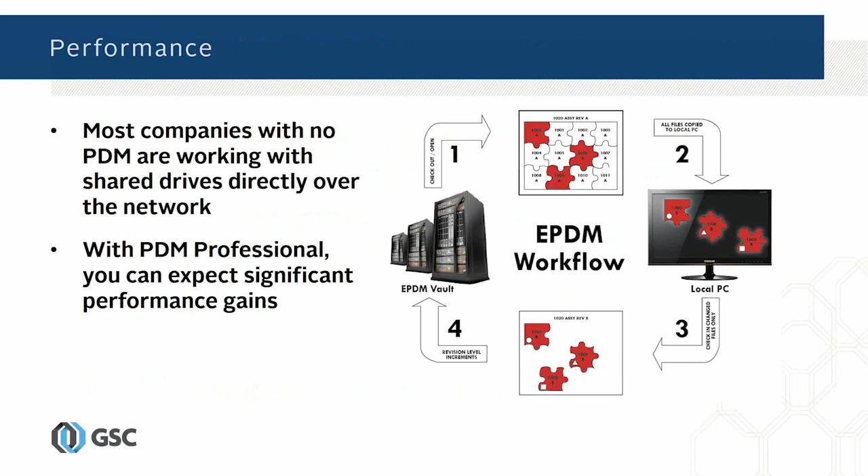The core values of PDM Professional are that you're going to have a short productivity curve. It's not hard to learn how to use as an end user. It's going to have all kinds of security, searching, data replication through multiple sites, multiple flexible workflows if you want to have it with PDM Professional, and data connectivity to other systems. Again, I'm going to be speaking more of PDM Professional on all these things, and then the scalability. So that's really what PDM Professional is all about.

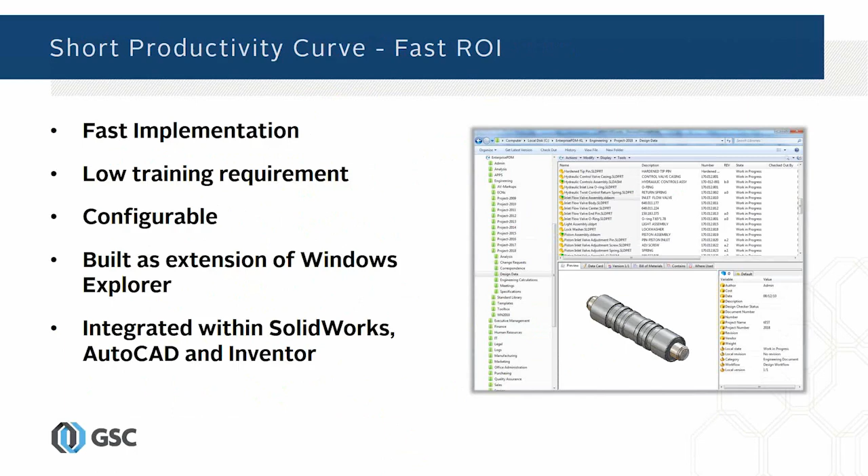The fast, quick learning curve comes from the fact that we really make use of SolidWorks and Windows standard constructs in the operation of SolidWorks PDM Pro. So if you're looking at the outside world, outside of SolidWorks, and you're coming in from Windows and you want to see what's in the vault, you just go into your regular Windows Explorer and mouse over to the virtual drive, which is actually your vault, and then boom, you have the information from PDM right there. It's all also integrated with your CAD software as well.

Design reuse means you can find things easily and quickly, so it's easier to find things and reuse them than it is to recreate the same geometry or things you think you may have made a couple of years ago. People do that all the time now because it's not easy, it's not fast to search in plain old Windows. But imagine if you had essentially a Google for your files and you could find them within a second or two of just typing in some parameters. That really can change the game quite a bit.

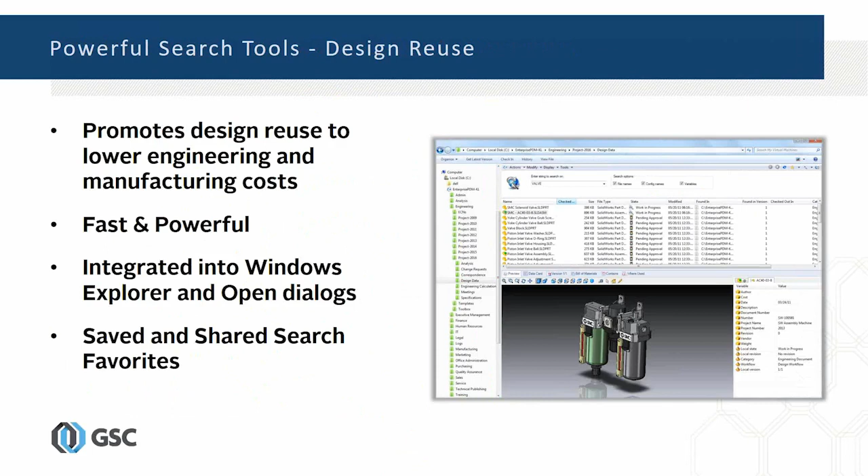Because we have workflows that you control, that you specify with our help when we do the implementations, it means that PDM will work the way you want it to and not the other way around. And you can, in PDM Professional, do multiple workflows with all kinds of complexity. Workflows can call each other. There's really no end to the kind of controls you can have. Again, this makes it consistent and secure when routing documents, making approvals, all those things. The workflows you have now can all be mapped into PDM Pro.

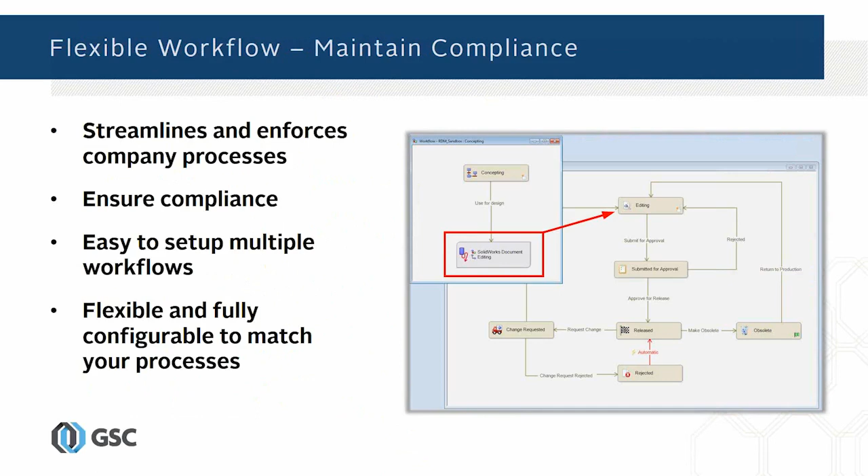Because it's nearly infinitely scalable in terms of number of users and number of sites, SolidWorks PDM Professional is a great choice for companies that are growing or that want to start small and then scale up over time. Because you can implement the solution initially with just one site, one server, and a few clients, maybe in a certain project, and you can go ahead and start growing that out and going to different sites. It's all built right into the SolidWorks PDM Professional software.

Data connectivity is something more and more people want to automate beyond just CAD and engineering. They want to talk to purchasing, the shop floor, and things of that nature. Because we're based on SQL, we have a database that can talk to almost anything. Whether you want to upload your BOM to your ERP system, export a list of items to purchasing, or whatever, there are all kinds of ways to do that. Not only can we do it on demand, we can also do it automatically as part of PDM Professional.

The security in PDM often surprises and delights IT administrators who are used to being locked into the Windows security construct, where it's file-based and there's not a whole lot of granularity in terms of options. With PDM Professional, we have all kinds of different levels of security based on files, based on folders, based on users and groups of users, and based on the state of the file, which we'll talk to in a little while.

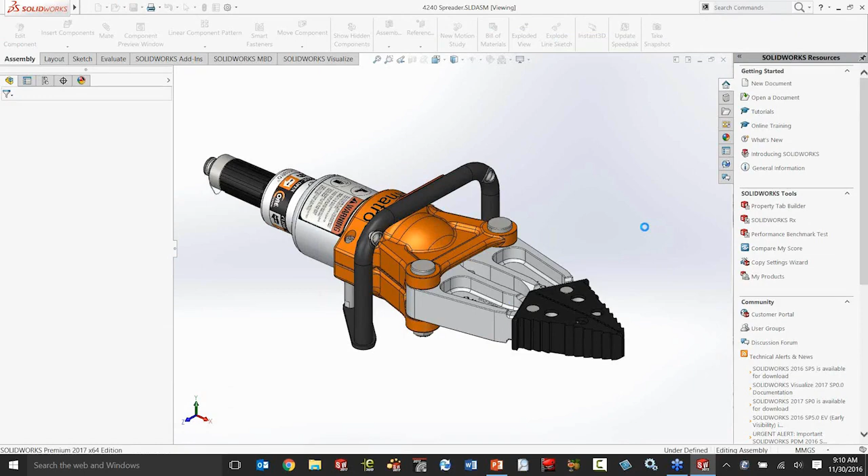So bottom line is, I say open. It says you want to check it out. I say yeah, good call. And that's usually all I have to do is just say yes, check out. So what it's doing here is it's going to actually download the files to my local machine, unless they're already local, and then I'll just open them up locally, so manage those copies.

So I open this guy up, and I have the ability to say change this. It's a regular SOLIDWORKS open. If I look over in the task pane here, I have a tab for SOLIDWORKS PDM Professional. And if you look at this tab here, we can see that we have some indicators of what's going on.

There's a pencil here because this thing is under editing, and I have an equal sign here. The equals is telling me the state of my local file set versus what's in the vault. So this assembly, these parts are all the same version as the one in the vault. That lets me keep track of what version I'm looking at, and also if someone else changes a part that they have access to that I'm referencing, when they check in the changes, I can see the indicator here that there's been a change.

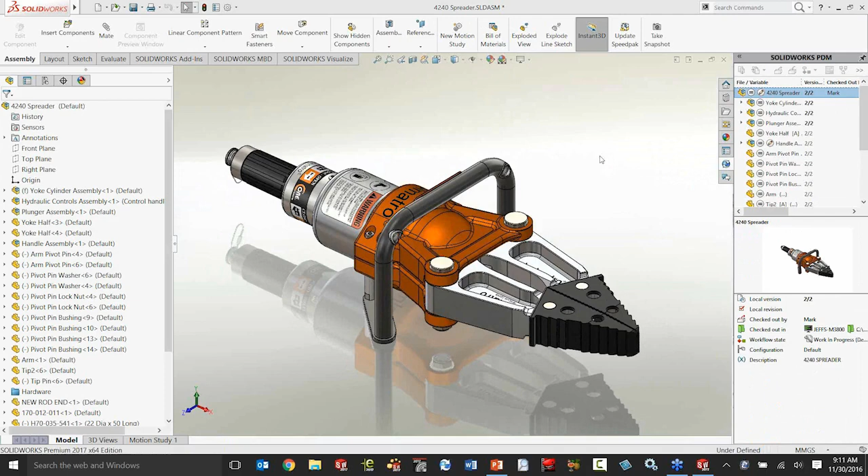But just to go through it real quick, our scenario here is that this thing is pretty much done, but we determine we need to have more strength in the front end and the arms themselves. So one thing I might do as a SOLIDWORKS user is I might decide I want to just open this up in its own window for convenience.

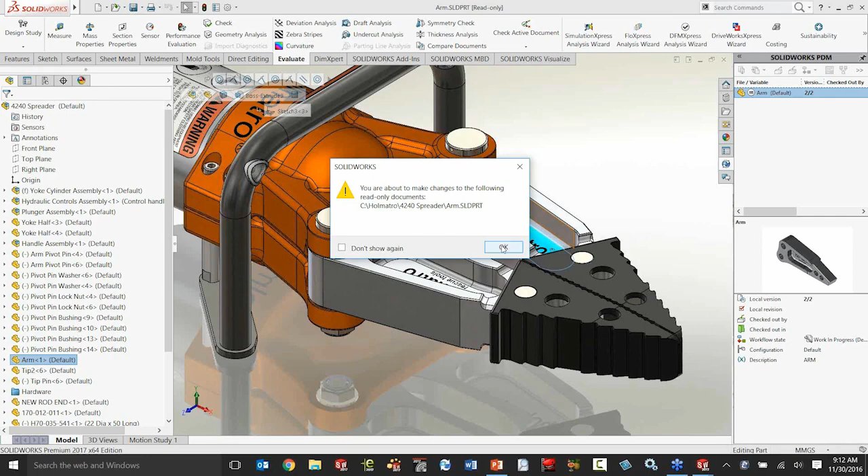Again, all the typical constructs that you have with SOLIDWORKS you can do here. So I can go ahead and click on this and open it up in its own window like I normally would do. And what SOLIDWORKS will do is say it's going to make changes to this read-only document. Why is it read-only? Well, it's read-only because I haven't checked it out yet.

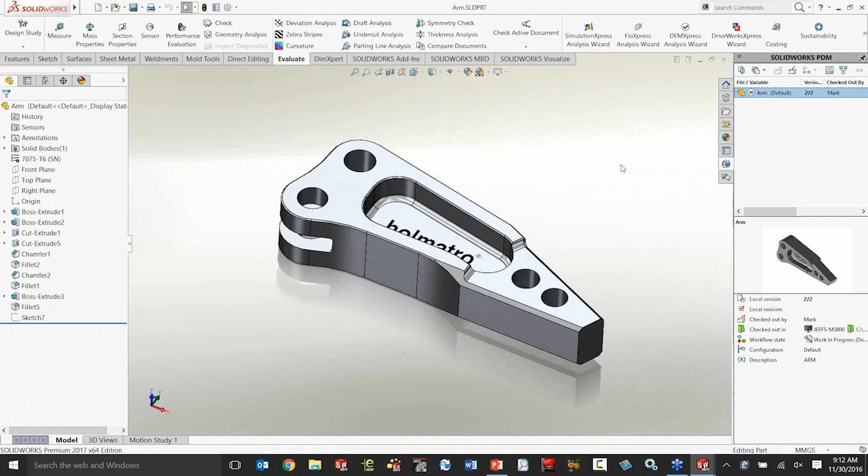So let's go ahead and make a change. Let's make it thicker. I'll take this web and I'll make it 40 millimeters. So that'll make it much thicker. I could do some other changes I want.

Whenever I decide that I want to bump up the version, save it, put a line in the sand here and say this is a version that I want to save, I just go ahead and say okay, check in these changes at this point. And it's going to bump up the version number, so it's going to go from 2 to 3.

And I'll say, what did I do here? I'll comment that I thickened the web. Regardless of whether I put a comment in here, the user, the version of the file, time and date stamp, all that will be kept in the file's history as we go forward.

And I should also mention that versions are not revisions. Versions are just 1, 2, 3, 4 - just a serial number, from 1 to X, of all the changes that occur in a given document inside a PDM. It's just a system that keeps track of that. It's great for the work in progress stage where I have versions. I want to go back to what I did this morning or yesterday.

I can do that. But revisions are typically reserved for things like a release process. Or if you do an ECO and you're going to do another revision, so A, B, C, or however you want to number and letter those things, that revision field is typically untouched until you get to a certain place in the workflow where the part or assembly or drawing or whatever is quote unquote released. So version is not the same as revision.

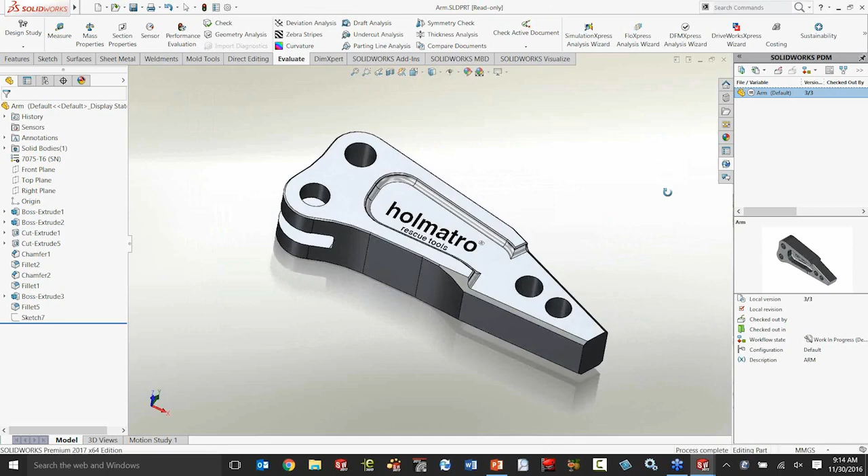So we made that change there. I can also go back to any version I want. Inside of SOLIDWORKS, the way I would do that is to say get version, I can go back to version 1 to see what that first version looked like. And I can do that.

We can also do this in Professional with Word documents and any other document that's inside there, but inside of SOLIDWORKS is how you do it. You can see here that it's warning me in the status field that I'm looking at version 1 of 3. It gives you this little red counterclockwise clock saying you're looking at something older than the latest version in Vault. I've also customized my interface to put a red line in that field.

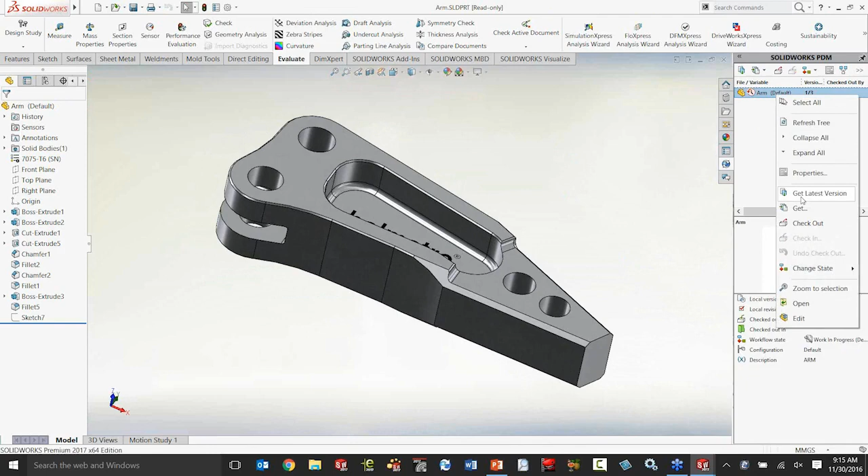This is really helpful when you're working on an assembly. Someone checks out one of the parts you don't have checked out, makes changes collaboratively, and then checks those changes in. Within 1 or 2 seconds, that line will change from the gray equal sign to this kind of scenario right here. I can see it and say, oh, that doesn't matter to me, that's elsewhere in the device I'm working on, I don't care. Or I can right-click and say go ahead and get the latest version right now, and it'll do that for me.

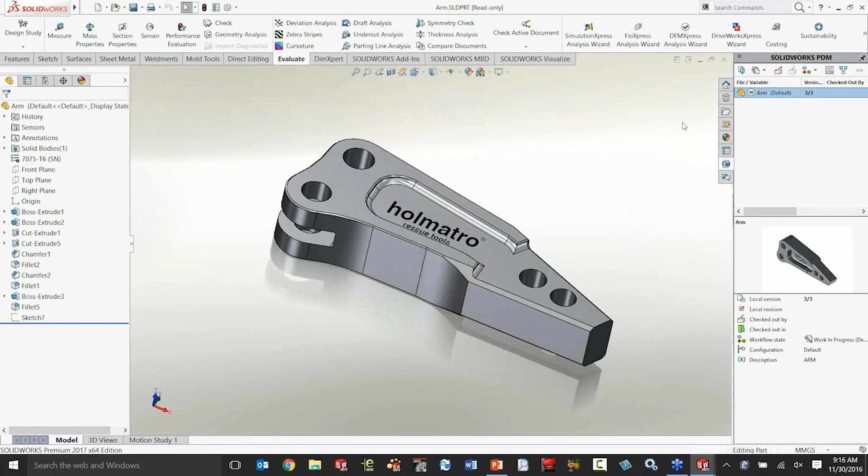With PDM, one of the great things is that you have this built-in history, the ability to go back in time without having to save v1, v2, v3, v4 versions of your physical files and try to keep track of all that stuff. It automatically does this for you, not only with parts, but also sub-assemblies, drawings, and assemblies. As I go forward, the assembly knows what version of the parts were in there, and the drawings know that as well. I just make my changes and let SOLIDWORKS PDM handle all the details of keeping the version history for me.

The other thing I want to do here is replace this part. So I'm going to get rid of it, just delete it, and I need to make or get a new one made of a better material that's more suitable to what we're doing here.

This is where design reuse really comes into play. If I want to reuse a file, the first thing I have to do is be able to find it. As I mentioned before, many times people will look for a couple minutes and then say, forget it, I'll just make a new one. That can cause all kinds of headaches and wasted time, if you don't have an efficient way to find everything that ever existed in your data, folders, which we do have inside of PDM.

So I'm just going to go ahead and do a search. I can do a couple different kinds of searches. The built-in complete search is the Swiss Army knife of all the searches, it comes with access to all your custom properties, and I can look for things at a certain point in the workflow, which we'll talk about.

So I just find released parts, for example. I can use our data cards. As you'll see later, data cards are a way for people outside of SOLIDWORKS to look at custom property information, essentially what's in the database. The data card is a presentation of that in a sort of a card catalog format. Different data cards exist for different kinds of files, because what you track for an Excel spreadsheet will probably be different than what you track for a SOLIDWORKS part.

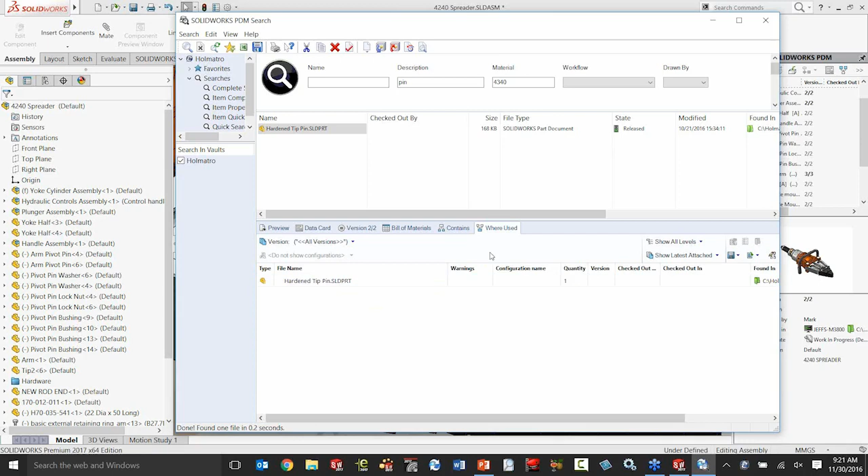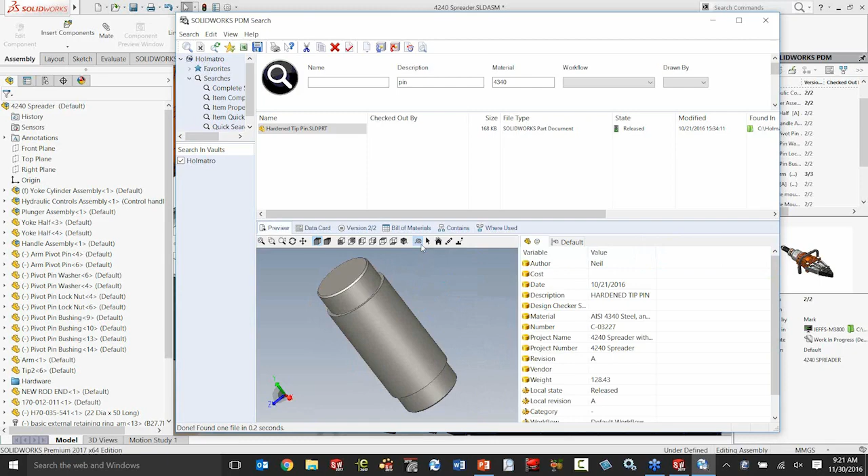I can also look at a preview and see what it looks like. This is the thumbnail graphic that SOLIDWORKS keeps inside the file itself. If I click in here, after a moment you'll see that we also have eDrawings Professional built into PDM Professional as well. So I can spin the part around and measure it to see what the diameter is, if it's going to fit. I could also keep track of diameter and length as data fields in my database and search on those, but in this case I'm just going to measure it and find out that yes, it is the right size, magically enough.

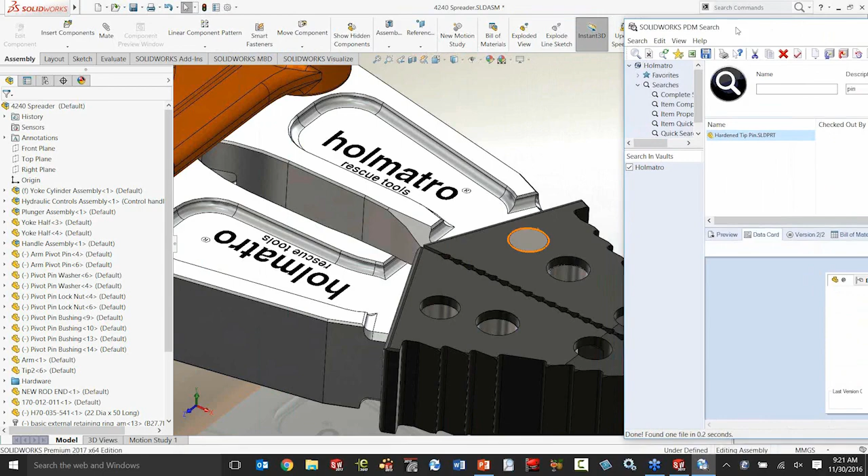So let's go ahead and bring this window over. It's just a regular Windows window, so I can drag and drop the part in here. If it's got 8 references, you can deal with that too. Now that I've done that, all I have to do on the CAD side is edit my mirror component assembly feature and add the new part to the mirror list there. So we got both of those.

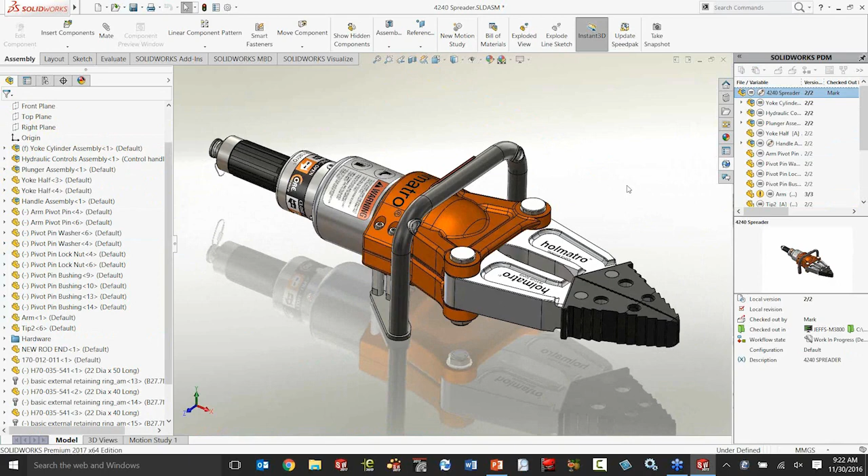So that's what it's like to make changes to parts and assemblies. When you make a change to an assembly or part, typically you also want to open the drawing to make sure everything looks good, maybe add some new dimensions. I can do that by doing the standard open drawing command from here, or find it in the database. But I'm going to do something different, I'm going to go to the regular open command in SOLIDWORKS.

Now you may or may not know that the open command and the save command in almost all, darn near all, of the Windows applications out there, they use the common object dialog for open and save. In other words, they use the dialog box construction that is part of and built into Windows itself.

So I'll go to open, find this, look at the data card, and say okay, let's go ahead and open that up. Now I'm opening up a drawing. SOLIDWORKS PDM comes in and says, well, it's in the vault, do you want to just open it and look at it, or do you want to check it out? Yeah, thanks, I do want to check it out because I'm going to make changes.

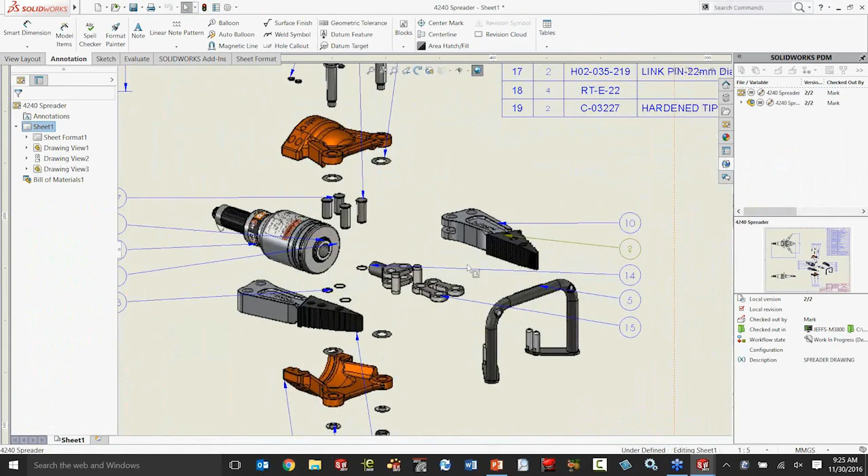And the system's actually going to make the changes mostly. It's going to update the graphics, it's going to update the bill of materials list. I might do some cleanup, moving things around, adding dimensions. In this case, I deleted that pin out there, and it was part of an explode I'm not going to edit in front of you right now. So to quickly deal with this, I'll take this balloon and point it to the new part, and maybe take this balloon over here, make sure it's not lonely, and do all the things you do to make your drawing look nice after updates, and then I'm done.

So what would I do? I'm going to go ahead and check in my changes to this drawing, so it gives a new version of the drawing. Now again, SOLIDWORKS PDM, the database knows all the links all the time. So if I want to check in this drawing, it's going to say, hey, this drawing is referencing an assembly that has been changed since its last check-in, you probably want to check that in, and it automatically does that for me.

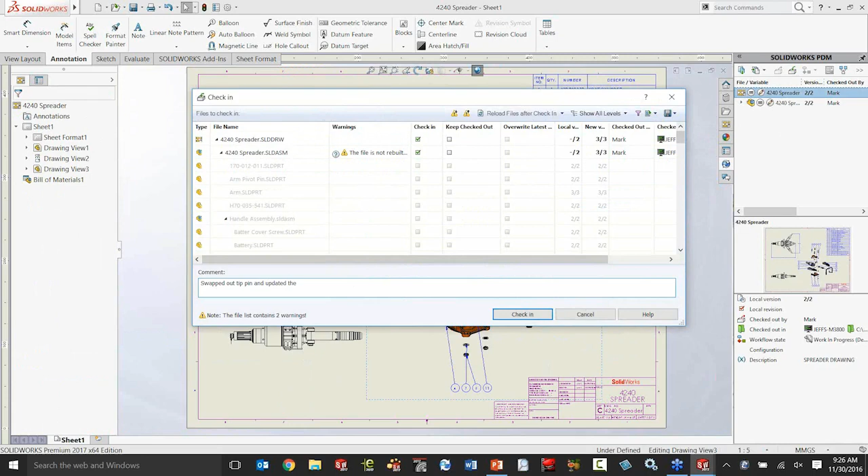I could clear that if I want to, but again, 99% of the time I'm just saying yes to this. Yeah, okay, that's right, that's what I want to do. And then with my comment documenting my change: well, I swapped out tip pin and updated drawing, like so.

As a SOLIDWORKS user, it's really nothing but upside. We put this in hundreds of companies, and people who were trepidatious when I first show it to them, afterwards when they come to a user group meeting and I ask them about it, they're always like, well, it's the best thing you ever did. I don't know why I was afraid of it. There's really nothing to be afraid of. It's pretty much nothing but upside for the SOLIDWORKS user, with very minimal change.

So what if I'm done with this now? We can just do check-in, check-out, version control, and get the searchability benefits.

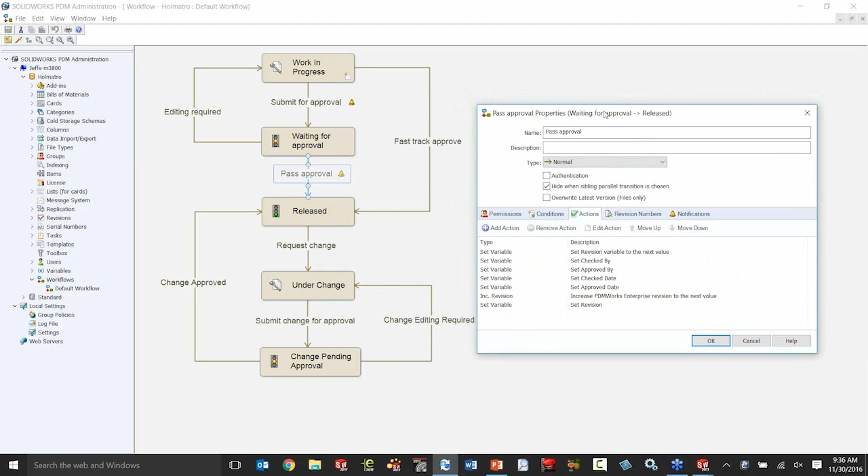And that's just a perfectly natural way to implement PDM Professional. And lastly here, I'm going to notify documentation people passing approval that they're going to need to get their stuff together and get that documentation finalized and published.

And then when things are in a release state, documentation people can do very little, they can view them and do some minor things, but the thing I want to call your attention to is the viewers, for the first time, are invited to the party. So when files were in a work in progress state or waiting for approval state, the people in this viewer group didn't even know those files existed. Now, once they're released, yes, they can see them, and they can only see them. All they can do is read the file content. So this is a built-in way to have it so that a certain group of people can only see the latest version of documents.

Now, of course, you can also make it so that it's not just state-based. You can also say certain people can only see release documents in a certain project folder, structure, or whatever. You can make it location-specific too. But typically what people do is they leave things in the project folders, and then use the states to regulate what people can do with the files based on their login and their permissions. So you're not moving files from folder to folder. It's just a much better way to handle that.

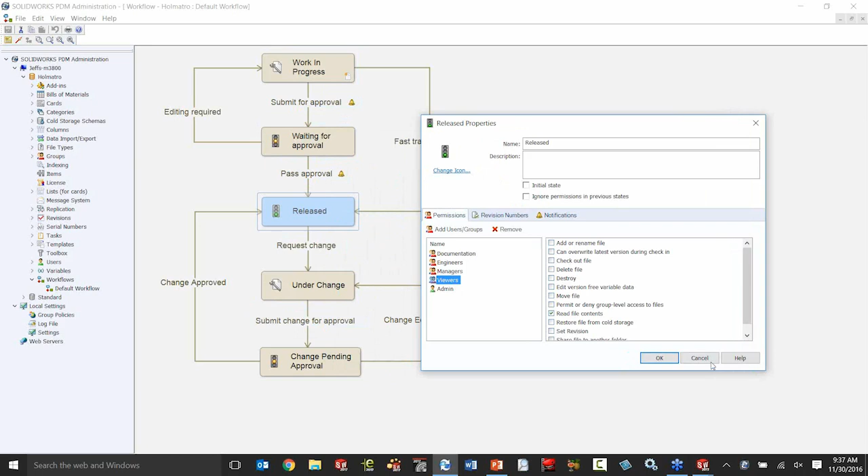And once things are in a release state, they sit there, and unless someone requests a change, it goes through a change process - you submit for approval, and either go back to edit it, or go back and approve it, and it goes to a release state again. Along the way, when the change is approved, as part of one of the actions we increment the revision, so it'll go from A to B or whatever. So this is a sort of typical workflow. It probably won't reflect exactly what your companies do, and you can get really complicated with this, all kinds of things. I just want to expose you to what PDM Professional workflows look like.

So I come in the next morning. Do I have to launch SOLIDWORKS just to open up my project and submit for approval? No, I can come in just plain old Windows - this is Windows 10, the File Explorer on Windows 10, and you can see it's a regular desktop and all other stuff. If I come up to this Holmatro folder, this is my Vault folder, so I log in that way. And I can go right to where I want to go inside here and find that assembly drawing, and say, yeah, now at this point, I am going to submit for approval right here.

So when I do that, you'll see that it knows all the reference items that have never been approved before - many of them have been, since I'm using many release documents. So those references, I could check them if I want, or submit for approval if I wanted to. But what I can do is, for example, this SOLIDWORKS Composer file that's part of this whole project - yes, it's part of the project, but I haven't touched it yet, so I'm going to hold that back. Again, you have control over what you want to submit, and you make your comments for the history.

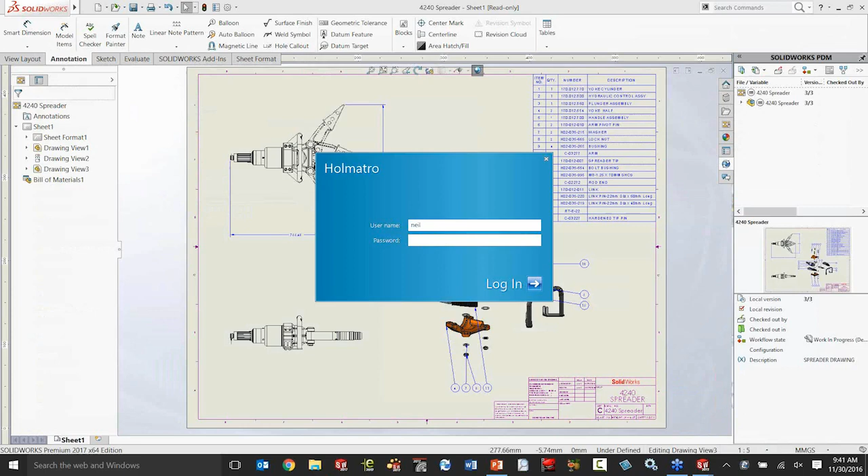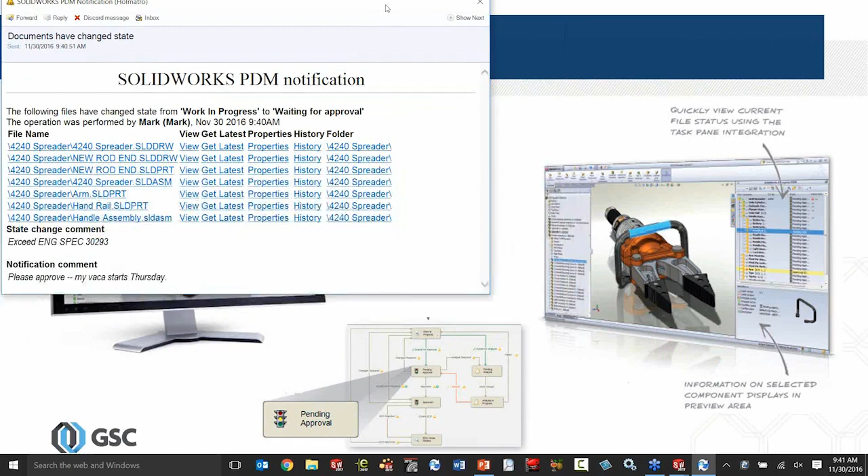Neil is one of our managers. So I log in there, and then I get a notification - a message automatically generated through the workflow that says, hey, you have some files to look at. That's part of the workflow.

And what's cool about this, it gives me the information of what's going on, going from where to where, by what person at what time and date. And then it builds up this nice list of not just the files that are involved, but hyperlinks to functions that you normally would do if you're going to do some kind of review like this. In the regular Windows interface, I'd go find this drawing and find its properties, but here I have it right here.

So let me see the drawing properties - I want to see the data card on that guy. Go ahead and do that right there, directly for that file. If I say view, it would bring it up in the eDrawings viewer. If I go down to like the arm and want to look at the history of it, I can do that right now. Again, the regular interface lets me do this, but this is a nice concise bundle - a list of the files involved in this situation that you need to look at, with hyperlinks to direct functions for those files.

Now this is a message that was generated by PDM, and I'm looking at it through the PDM internal messaging system. Most customers don't use the internal messaging system for PDM - what they do is use their SMTP, going out to any SMTP server for messaging. So usually this ends up being in their Outlook inbox. Contents are exactly the same, just the wrapper is different.

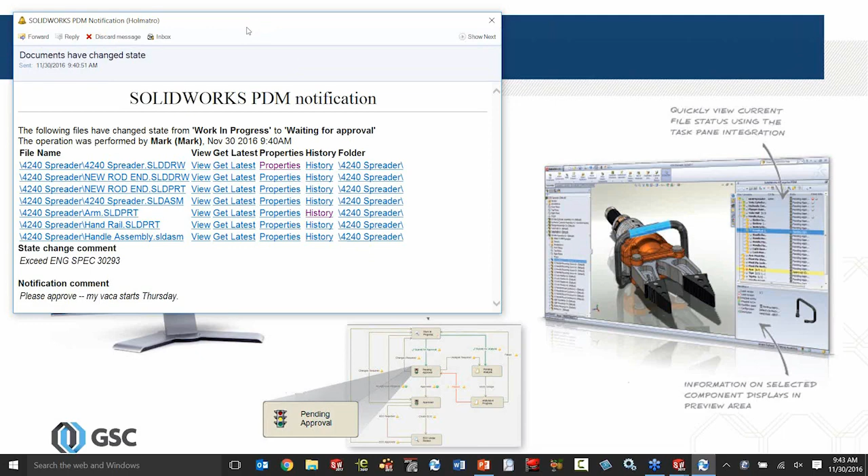My pro laptop has every software you can think of loaded, including its own SQL server. And the last thing I want to do for this pro laptop is install and maintain an Exchange server. So that's why I'm using the internal messaging system built into SOLIDWORKS PDM. But again, you typically will see this as an email.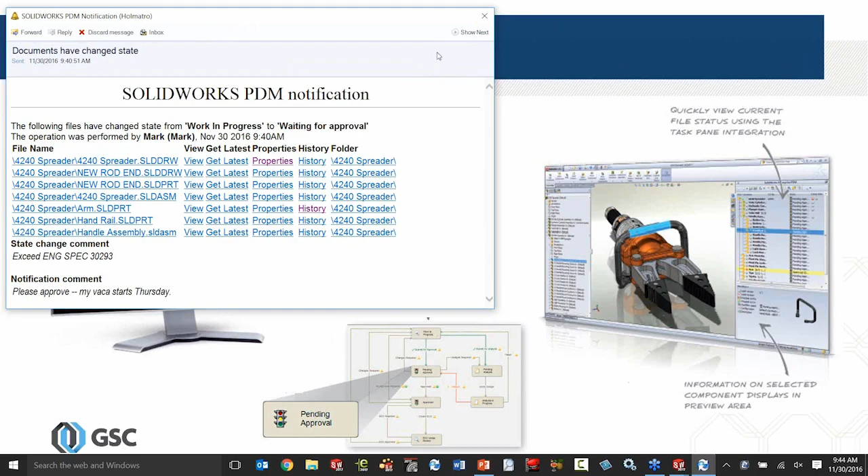So what happens if I'm just looking at this, but I'm not going to act on it right now because I've got a conference call in 5 minutes? What I could do, if I'm in Outlook, is put one of those little red flags on it to remind myself. But again, if you're a typical person, you walk into the office, log into your email, and get this email along with 35 other emails - like donuts in the break room. So you've got to wade through it after your conference call.

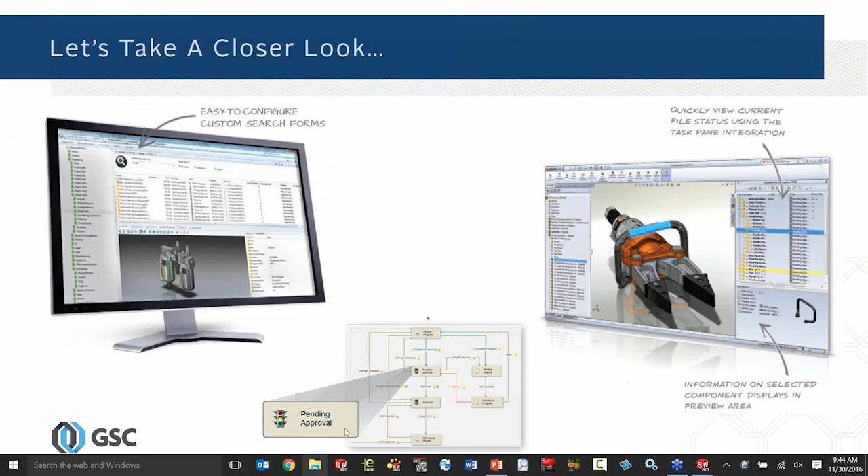Well, I want to call your attention to the fact that everything inside of SOLIDWORKS PDM is searchable - everything. So if I go into the regular interface here, regular Windows, and start looking inside, I can say, oh, you know what, I'm going to do a quick search.

In this case, I don't care about the name, description, or material - I care about where they are in the workflow. Show me all the files waiting for approval, and I could narrow it down by a certain person. In this case I don't care, but I could narrow it down just to Mark, and then boom, there it is - all the files waiting for approval are listed right now.

So all the things you do inside of PDM that are kept track of in the history are searchable, whether it's something you type into a property field, or something the system generates, like it knows what the state is going to be, or it knows the date.

So I can go and say, show me all the files that are older than 30 days in a state of work in progress in these folders. You can build up all these different queries and really dig into your data, and do a lot of really awesome things with it. You really kind of own your data, and can see everything in a way you could not ever do before with just plain old Windows.

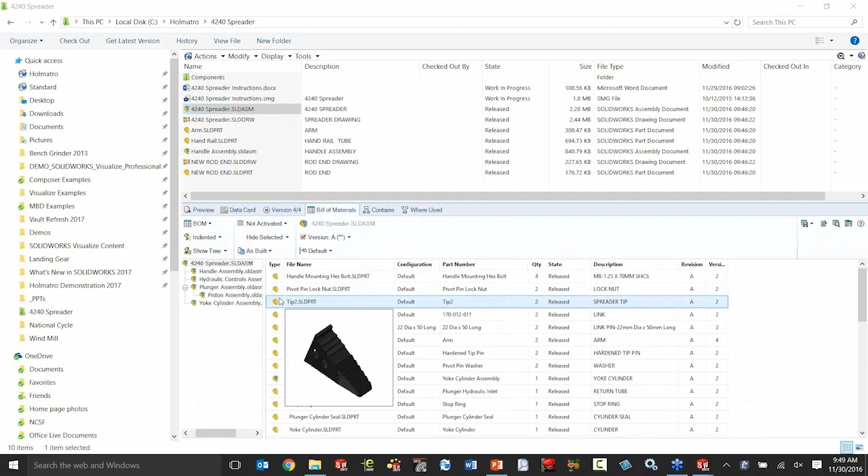Contains all these items here. You can see the contains, but there's also the bill of material tab, which is actually the BOM as it would be inside of SolidWorks, but without having to be inside of SolidWorks. So as a non-SolidWorks user, I can actually look at this BOM and look at all the data information I want. Again, these columns can be whatever you like. I can hover over these things and get a thumbnail so I can kind of see what they look like, and I can drill down into subassemblies if I want to.

I also have the ability to go back in time. This is the latest version, revision A, of this assembly, the release version. If I want to go back and see what version 2 looked like, I can do that right now, and then boom, there I'm looking at it. So I see what versions of which parts and assemblies were used in that version of the BOM of this version of the assembly. Not only can I do that individually, but I can also compare.

I'll go back up to the release version, and I'll compare that BOM with an older version like version 2. Now I have immediate direct feedback showing me what's different. Everything where there's green is new, everything that's yellow is modified, and everything that's red is deleted.

I can see here that in this ARM part, which was already there, we started making changes to it in this session. What changed was, it used to be a blank revision field, and now it's A, and the version was starting at 2, and now it went all the way up to 4. In terms of this hardened tip pin, all these fields are new because I added that part in between version 2 and the latest version here. Likewise, you have a couple more updates of versions and revisions. Then down here, we have all this in red because I physically deleted this part completely from the assembly between version 2 and the released version.

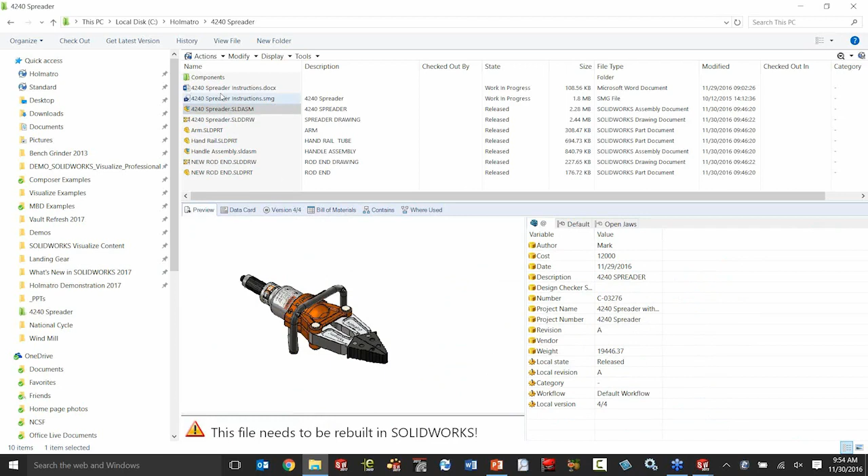I should also mention that our preview window works with multiple file types. Because we're in PDM Professional, if I look at a Word document and click on it, it'll show me that Word document right now. I can see this is a Word document with kind of a shell, with a bunch of placeholders where eventually pictures would come, probably out of Composer in my case. I can look at the contents of that, and I can look at contents of Excel spreadsheets, PDFs. Any of those things can be managed right inside of PDM Professional, and you can version them, and have them go through processes, controls, and workflows, just like any other SOLIDWORKS document.

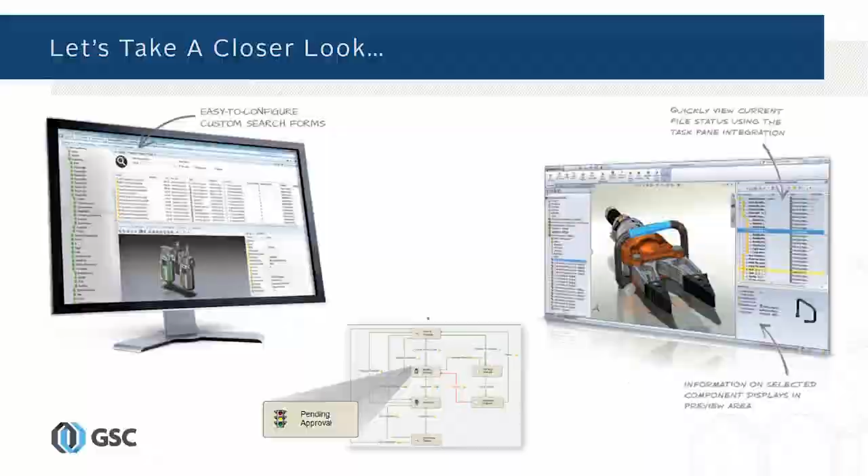So that is an overview of what it's like to manage your SOLIDWORKS data inside of PDM, and a little bit of extra overview outside of the basic SOLIDWORKS user.